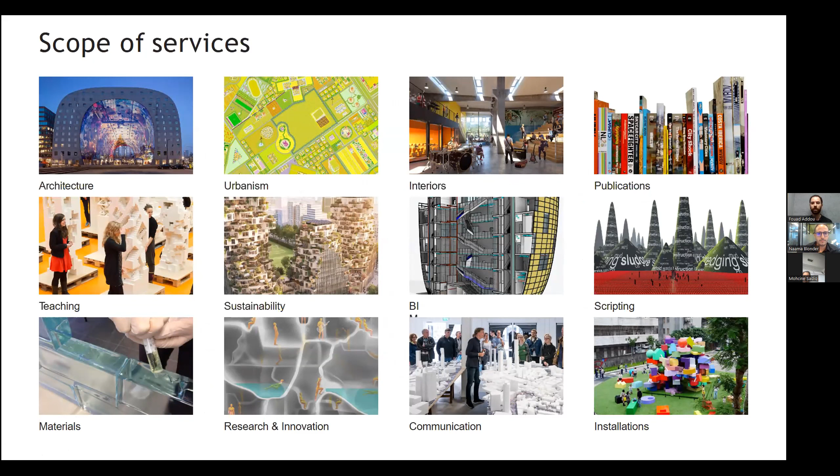So I was asked to talk about density, like how to smartly densify a city and how to deal with high rise. I think that often starts with the fascinations that an office has and our founders had back in the days. A couple of those I'll sum up here. One of them is the idea of the vertical village, basically taking all the qualities of a village, which is the small scale, people know each other. There are many informal ways where it's logical to meet each other, and there are all these qualities that you often lose when you densify and when you design high rise in the city.

So one of the interests is how to do that in high rise. So I've been doing a lot of research and a lot of model making with students and a lot of testing how you could apply it to a building. Of course, a building cannot look like this, but maybe more like this, and probably this is even too complex.

Another thing is how you can make the city more green. Often when we densify, there's a lot of concrete, a lot of vertical facades that are fully glazed, but there is very little green. And often it's only in the horizontal plane on the ground floor. This is, of course, a very abstract image, but what we try to do in collaboration with TU Delft is to find more practical ways to script and test how much a city can handle green on facades, inside buildings, on top of buildings, around buildings, and how can you practically do that?

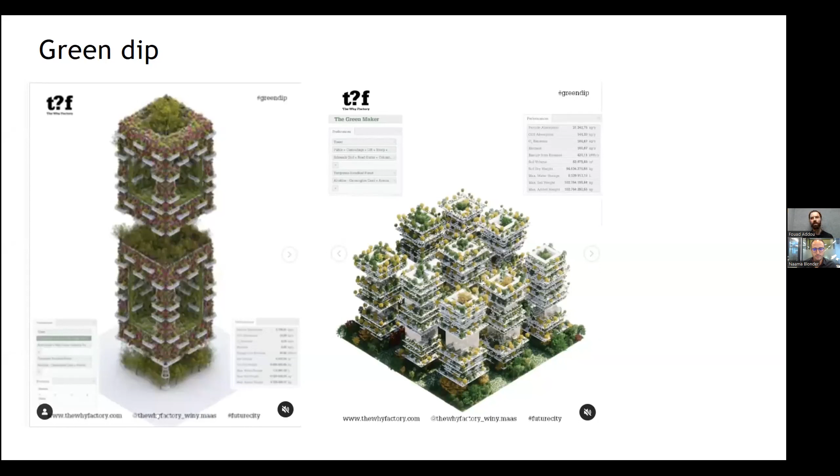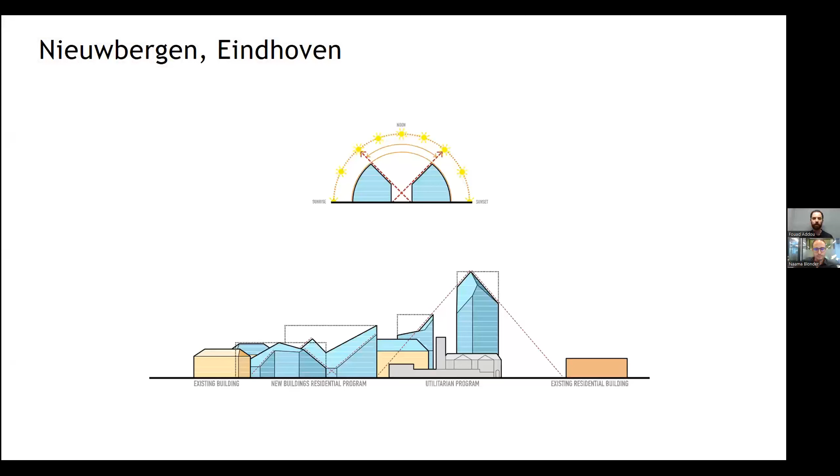And often the belief that people have is that trees and plants cannot grow on top of buildings. But I think it has to do a lot with the way, if you have enough soil package, if you choose the right plants at the right height in the building, that we did in several places. So also in Eindhoven, we have a master plan that basically is dictated by certain sun rules and creating good quality on ground level.

And another thing we try to advocate a lot is the possibility of rooftops. Often rooftops are for mechanical spaces and that's it. But how can we use those rooftops in a better way? How can we activate the city in a better way? So we have this yearly event.

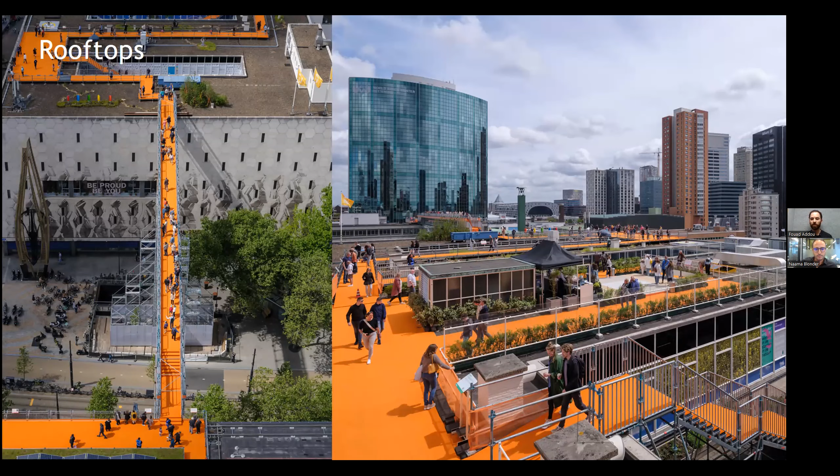It turned into a yearly event in Rotterdam, where MVRDV tries to build these temporary structures that either cross between different roofs or stairs that go to roofs to basically advocate for using roofs better. So there will be exhibitions, all kinds of programs, events, parties on roofs to advocate this to the city.

And we developed this rooftop catalog that shows all the possibilities of how to use roofs and tries to inspire municipalities and possible developers. And of course, there is the question of a city that easily becomes too generic if you just build for the amount of housing we need and don't spend too much on regulating how buildings should look. So we always advocate the idea of having diversity within a kind of overarching

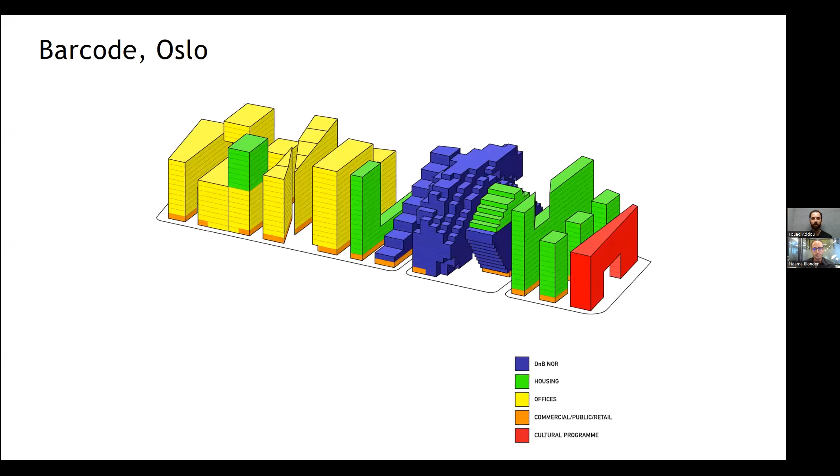So it's a collection that relates to each other, but also is very different. And we think that's important in the city, that you have diversity. Here you can see basically the volumes, if you would take those rules very literally. And I think then, if we go into high-rise, it comes with certain challenges.

I think we as architects have the same or similar challenges all over the world, but also some challenges are different based on your culture, on your municipality and the regulations that you deal with. I think we're often dealing with cities that have to grow really fast. There is a huge demand of housing, and how can we house all these people in the fastest way and often the cheapest way?

But then can we do that in a smart way and keep quality in the city when the city needs to grow so fast? And we're working more and more in Toronto now, and that's I think a great example of how a city that has to grow so fast still needs to keep certain qualities.

And how can we avoid that high-rise cities become too generic, too anonymous? Often you lose human scale when you have to build something fast and house people fast. So how do you keep that human scale and quality in the tower?

Then often what we experience, at least, is a lot of pressure in terms of budget, in terms of efficiency of buildings, which sometimes leads to kind of irrational floor plans that are not the best for the people that live there.

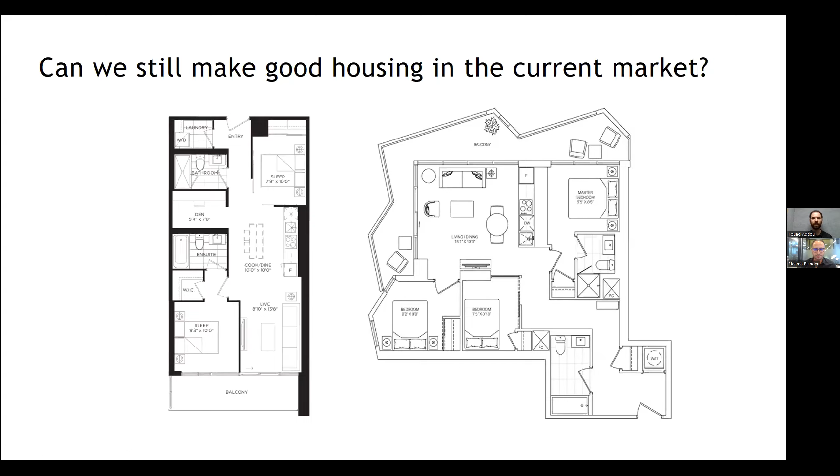And the other is the contact with nature. Of course, it's very difficult in a high-rise city to keep the contact with nature also higher up. Is there a way to still do that? And often we start to question ourselves more and more, and that same discussion came in Toronto in the Quayside competition. When you go up really high, there's a lot of wind and a lot of difficult conditions. Does it even still make sense to have balconies?

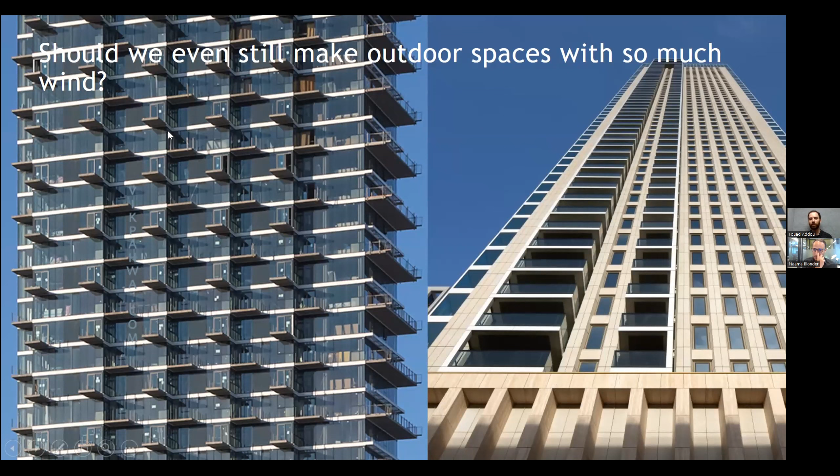On the left side, for example, this is Quayside, one of the towers, the balconies became so small at this height. Does it still make sense to make balconies there? And how do you create qualitative balconies higher up? So over time, we, as MVRDV, did a lot of competitions, and we also started building more and more high-rise buildings.

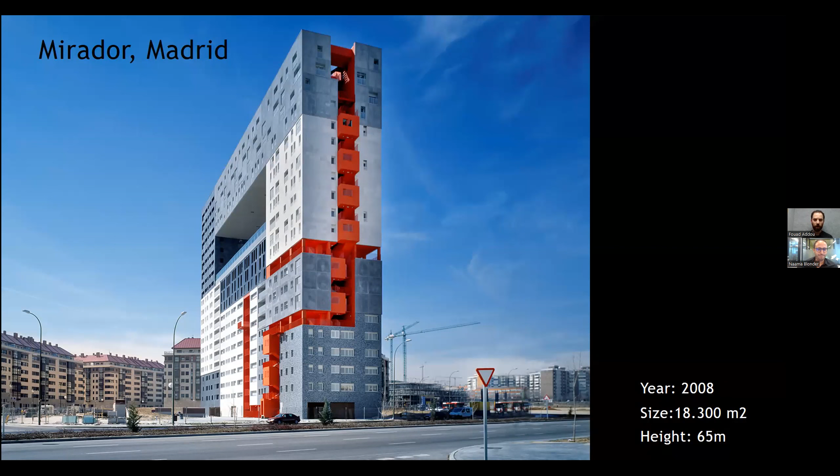And I think there are a couple of themes that we try to always integrate into the designs, and it's different per project. But one, for example, is how to create vertical communities. And I think one of our classics, the Mirador in Madrid, is not necessarily super high, but it has those qualities, I think, to create a vertical community.

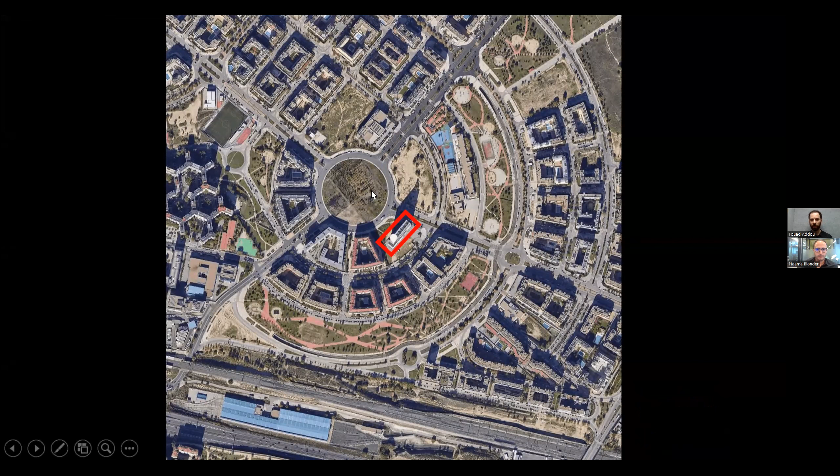So basically, it's a building block that has a different typology than the buildings around. It's kind of an outskirt of Madrid with all courtyard buildings. Of course, it's quite an iconic location around this roundabout. But we tried to do something very different than what was already there. So basically starting with the idea of the quality we liked. So the courtyard block where people can all meet each other, and it's a nice typology of living.

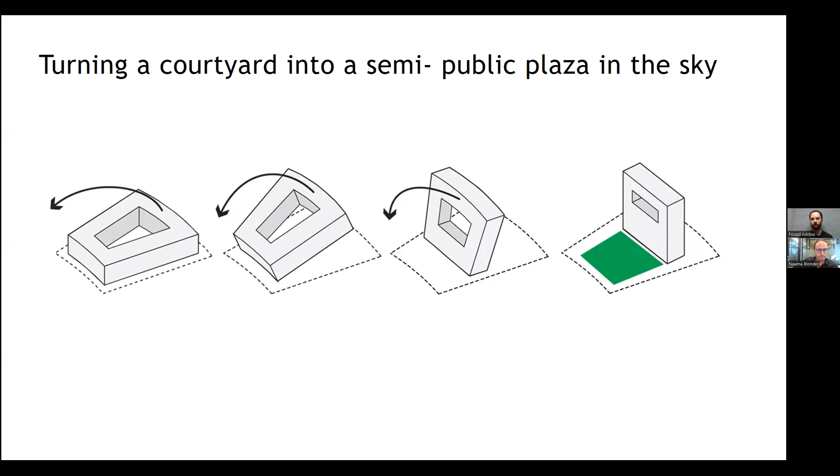But how can you reinvent that if you have to go higher? And at the same time, leave more space around you for other developments. So we literally took the courtyard block and turned it on its side to create a very nice public space next to the building, but also inside the building higher up. So you can have gathering high up in the building.

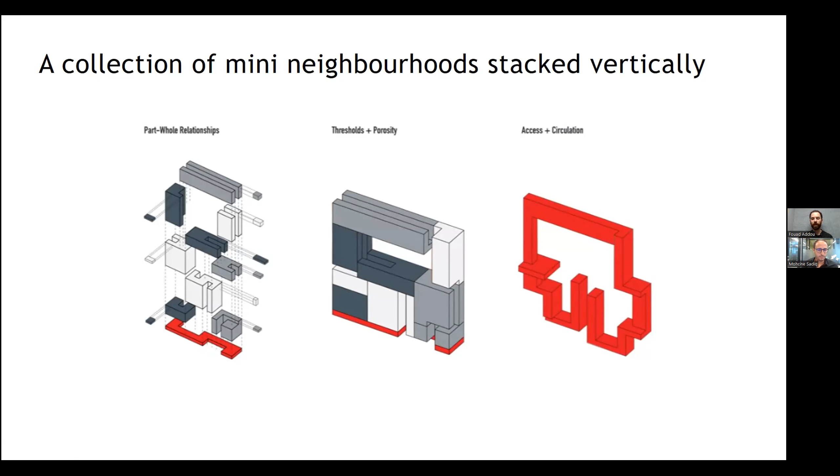But I think in that way, a vertical building becomes way more interesting because you have a diversity of apartments, diversity of people, therefore, and kind of streets in the sky that you would not have in a normal high-rise. Like, for example, this one, this is an outdoor street that is much wider than a corridor, where people can meet higher in the sky instead of on the ground floor, which I think is quite interesting.

Another thing is how to humanize the tower. Often towers become quite generic and you lose the human scale inside because every floor is the same. We need certain typologies of apartments that work well in the market, and that's it. But how can we do that hopefully better?

So this is an example in Amsterdam. We call it the Valley. The highest tower is 100 meters high. It's a collection of 3 towers together with one base building. It just finished building and people start living there.

So the idea was here to, first of all, we started with the program we needed and then we pushed the towers to the edges. And the edges would represent basically the relationship with context. It was quite a corporate environment with a lot of glass facades.

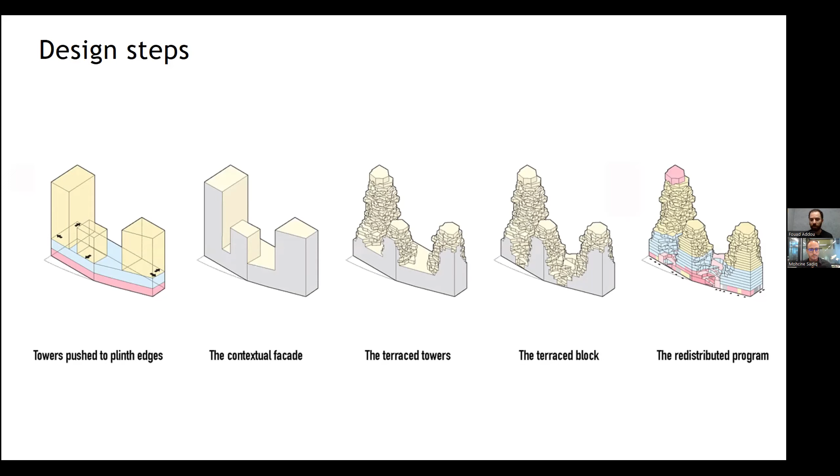So we said, okay, the outside is relating to its context, but then everything that happens behind that exterior facade wants to tell the story about creating human scale and starting from the individual unit to start expressing the individual unit, which normally you never read in a tower. And that altogether as a composition became a kind of natural valley, as you can see it here.

So of course it looks quite expensive and it most probably was, but I think it all depends on the environment, the moment in time you build something, having the right party next to you that has the same ambition and kind of daring to take that leap.

And I think here you see that contrast between the exterior facade, which is the contextual one, and the interior where you start reading those individual units. And the interesting thing here, I think, is that by breaking up the volume and creating all these different units that come out and go in, you also protect the balconies from wind. So you get a way nicer climate on your balcony than you would have in a normal balcony principle.

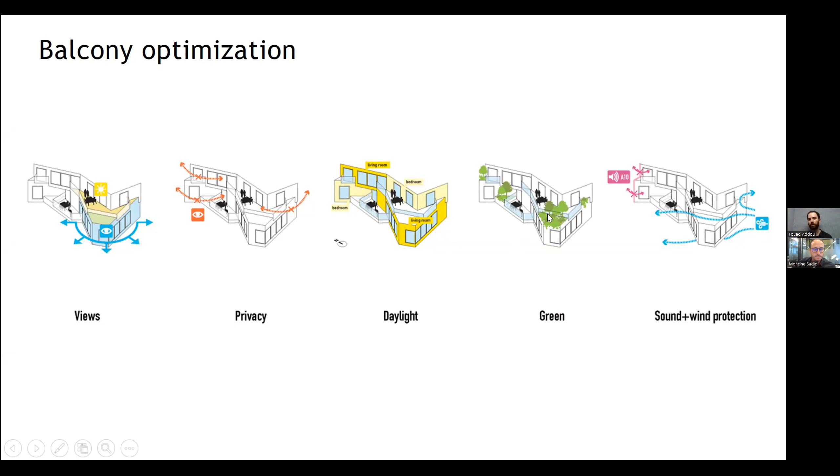So we try to do it a lot in the company, to use scripting to optimize your design. So we used scripts to optimize views from your living rooms, to create privacy between balconies. Of course, when you pop out your volume, that becomes a challenge: to make sure you have enough daylight in every block, because when a block sticks out, the apartment below has less sunlight. So what is the optimal condition? And making sure that every single balcony has its own planter and its own green space, and is protected from wind and sound.

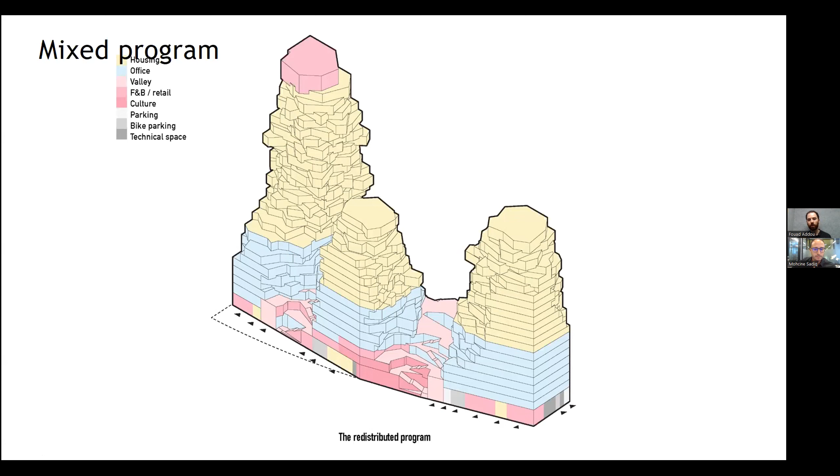So this is how it works programmatically. The ground floor, like most developments, was fully retail and culture and F&B. Above that, we stacked offices and then the housing on top. And I think the interesting thing here is that there is a route going all the way that connects publicly over the terrace and goes down again. I think sometimes it's important to push a little bit, because of course this could have been closed off, could have become a private terrace, but sometimes it's important to push a bit to take that one next step and to make sure that everyone can use it.

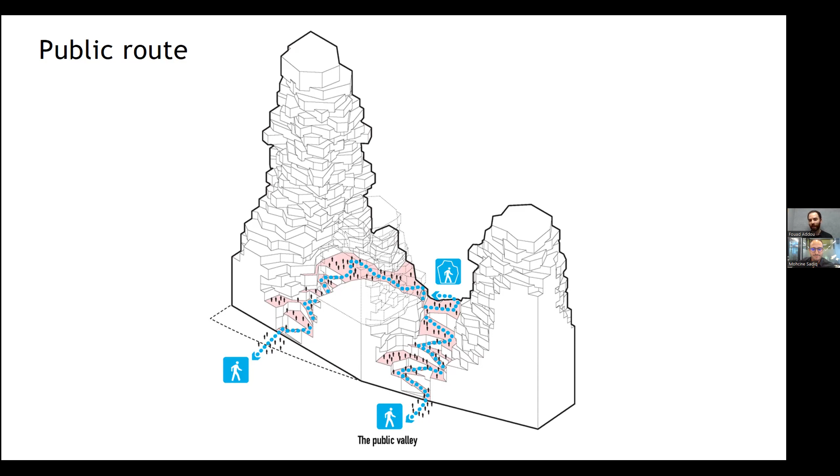And now, for example, people who work there take their lunch breaks there, but actually people from five buildings further also come here to take a lunch break and overlook the beautiful sports fields next to it. So giving back somehow. So this is how that looks. This is the office floor with basically a valley trail that goes up over the terrace and down again, which is open during the day for everyone to enjoy. And then the offices around it.

So we try to use this vegetation strategy that starts very intense at the bottom and becomes less intensive towards the top, choosing the right species that could survive higher up in the building, and the right species for a lush vegetation lower down.

So if you go a little bit higher, those are the apartments. And of course, at first sight, it looks pretty complex. All the apartments are different, which is often the response when we work together with the developer, which of course makes sense. But at the same time, if you look at the plans in a more pragmatic way, the center of all the plans is the same, and every floor of the apartment is actually the same. But the outline dictates having a slightly different living room or slightly different bedroom. And in that way, we believe every apartment becomes different, but has the same services, the same shafts. So it's quite easy to build in that sense, but everyone has a choice to have a completely different apartment.

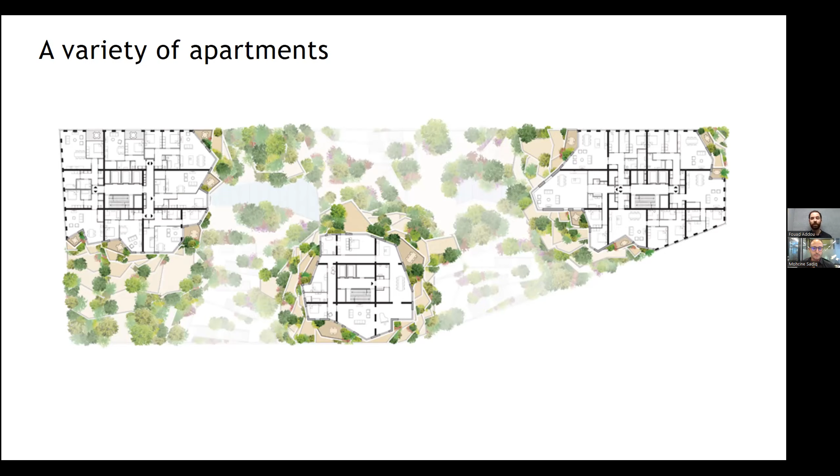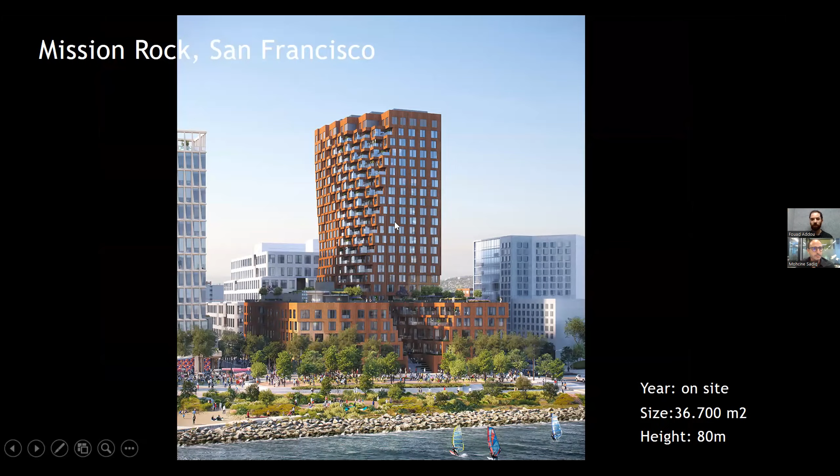So this is a building we almost finished in San Francisco. It's almost done building. It has some similarities to the previous project. It's around 80 meters, but it has one tower. The location is opposite the Giants Stadium. It's a development with other architects, among them Henning Larsen, Studio Gang, and WORKac, where together we developed this small master plan. It's facing the water, and of course one of the most important things was the relationship with the water.

So what we try to do here is stack the program: retail, office, and residential. But one of the problems, which we then tried to turn into an opportunity, is that there was a huge residential floor plate that we couldn't really use, and it was too dark.

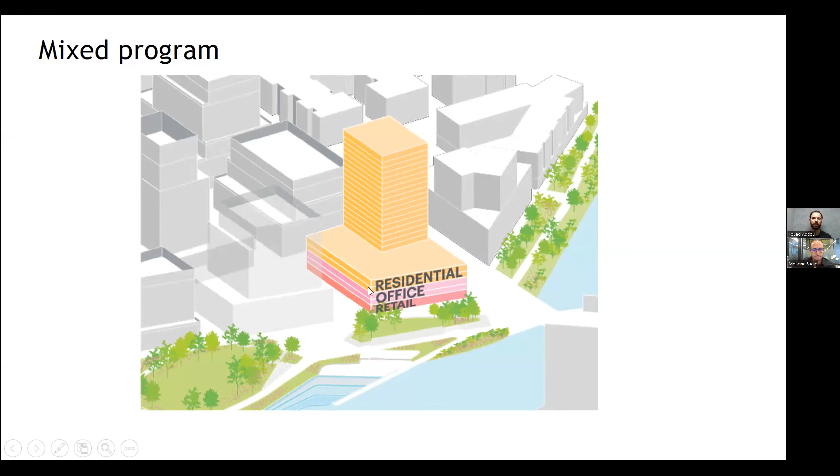So it's okay, how can we turn it into something that actually makes the master plan better? So we basically cut up the volume and created an L-shaped apartment block and a smaller apartment block with a public route going through that would connect to other public carvings that go through the building or over the building or around the building in the other buildings in the master plan. So we become part of a network through the rest of the development.

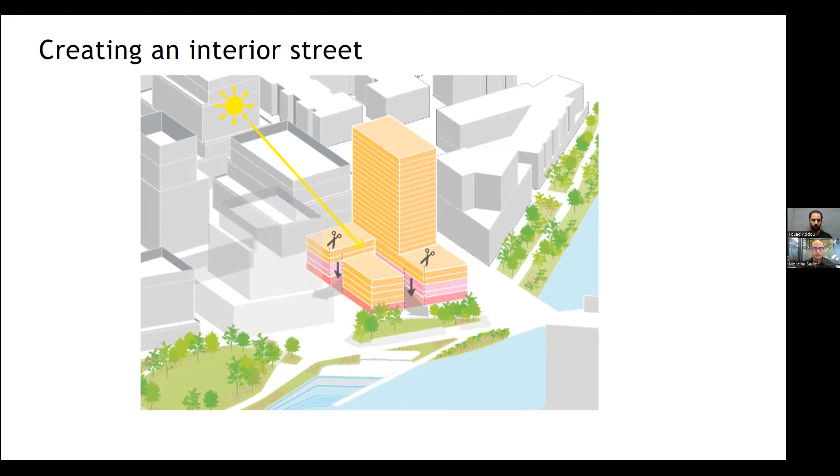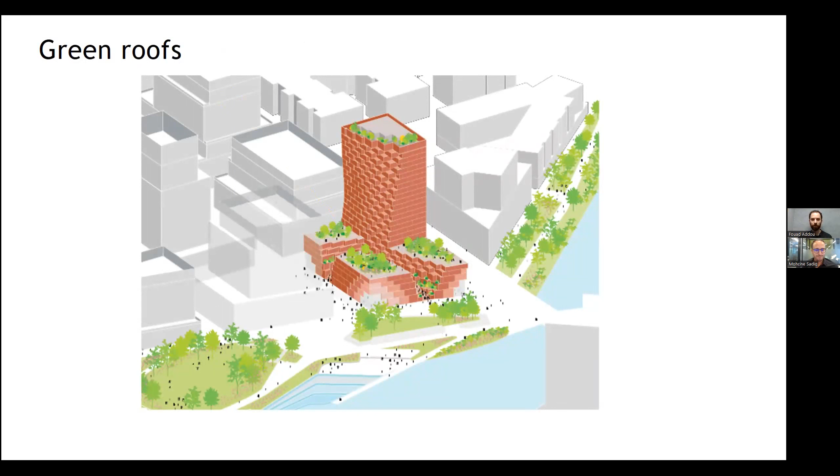And then that carving, we turn it into, again, like a fragmentation of the facade where you have the individual balconies, which then became, we call it a mission rock. So sort of a valley going through with fully green terraces on top of the base building. And I think one of the qualities is that, and this shows when the budget is sort of tight, but there's a bit of space, where do you spend that budget?

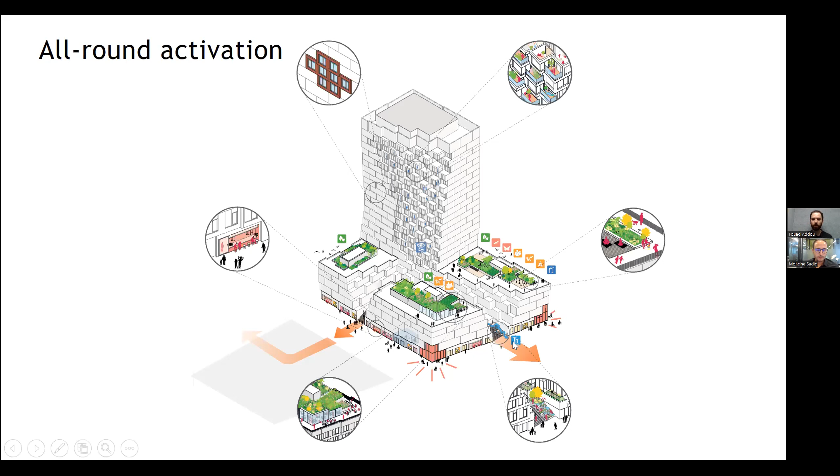And what we try to do here is to create it in the space that faces the water, so where the most interesting views are, and basically try to create all these apartments with corner conditions, because normally there are only 4 corners in the tower, but by pixelating and fragmenting the facade, many apartments start to have a corner with 2 beautiful views towards your context. And then we say, okay, the rest, since there will be a lot of wind, like in most towers, there will be no balconies. With then the publicly accessible or communally accessible roofs and the public route going through this canyon in the center.

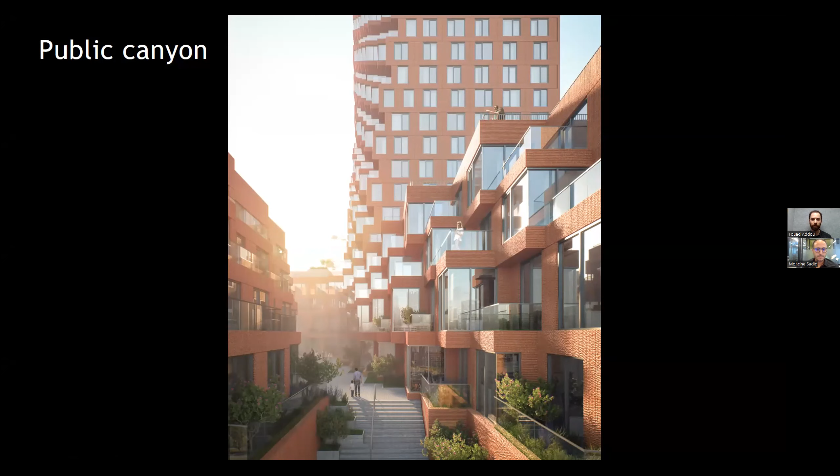So this is how that looks like. It's pretty far already in terms of building, but this would be that route. So of course there were a lot of discussions. It's always the question of, like, do you have to close off that canyon later in the day? Is it safe to have everyone going up? And we of course understand all of that. But I think with a bit of collaboration, we managed to convince that it was worth it to have this public route. And we're really happy that we managed that in the end.

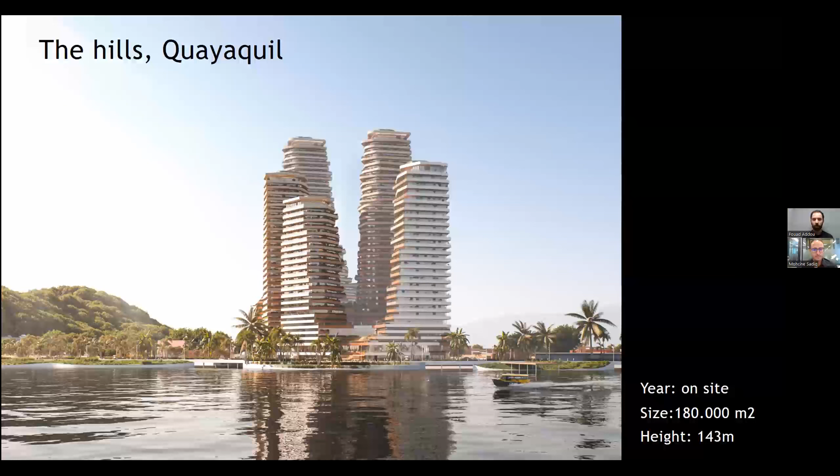And another thing is the vegetation. We already talked about it a bit, but we tried to bring that to the extreme in Ecuador. So this is the development. Now it seems, of course, very out of context because there are no other buildings around yet, but there will be a waterfront full of high rises, where we developed 6 towers that currently started on the site. The highest tower is 143 meters.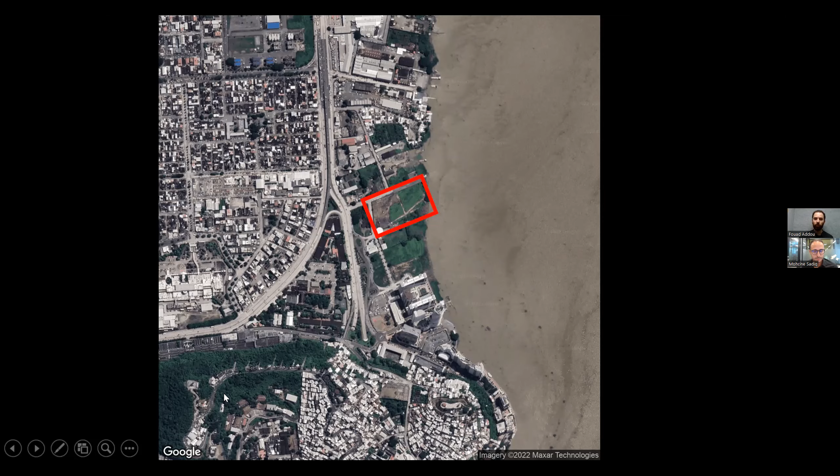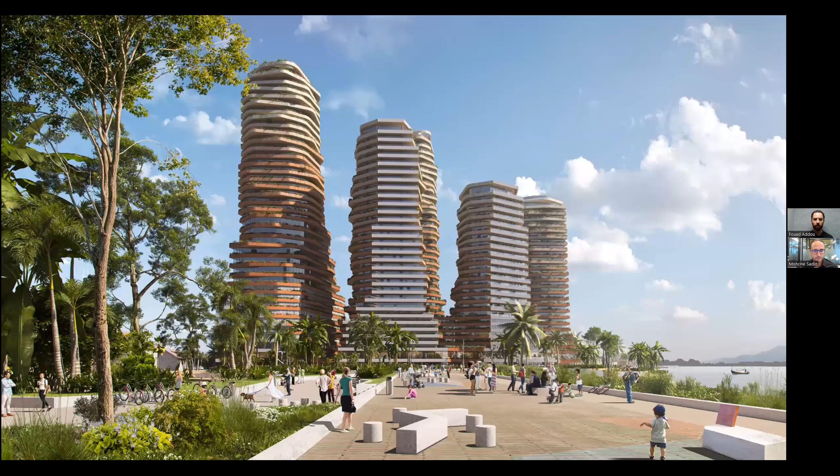So basically, the inspiration for this project was having a lot of human scale, very small informal developments on a hill next to us, which was super green, and that hill was really important for the city. We thought, how can we take that as an inspiration and basically not design only a skyline, but also design a natural topography. So become part of nature instead of only making a city gesture. So it had a similar concept.

So the outside was very similar to the buildings that are further up in the waterfront. So it's a lot of Miami-ish white facades, and everyone loves that there. But we thought, okay, we can do like everyone else, or we can try to make it slightly more interesting and try to introduce color, materials that relate to nature, and integrate vegetation, which they didn't have anywhere else in the city. It was all just empty balconies. So that's why we tried to create this interior world that was fully vegetated and uses materials that refer to nature.

So basically the starting point was we needed to make 6 towers at the beginning. Now there became 5 residential, commercial spaces in the bottom, and a lot of amenities, which we really appreciate. This developer pushed a lot for amenities as a collective need. We tried to push down the towers and create a bit more human scale towards the waterfront and go higher towards the more urban side on the back. And I think often in towers, especially when you design a collection, it's very important that everyone has good views.

Like everyone has a qualitative apartment that has nice views to, in this case, the river. So the buildings were completely shaped by optimizing views for all the towers. So even within a very dense environment, I think you can try to optimize the quality of every apartment.

Then we connected all the volumes together towards the base step volume, which would help you to break the wind, and at the same time gives you the opportunity to have a lot of communal spaces and a lot of vegetation between the buildings. And then we rounded it off, first of all, for safety reasons on the ground floor, because there's a lot of security problems there. And also by rounding it off, you basically make sure that there are never really corners, and corners are usually the most problematic when there's high winds.

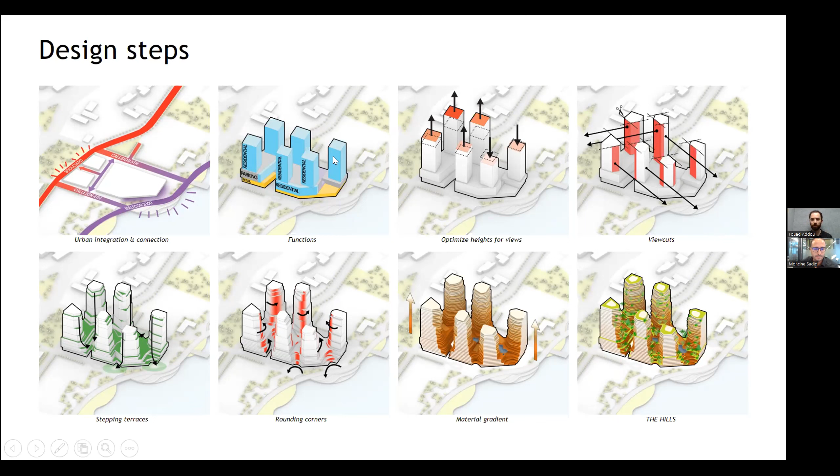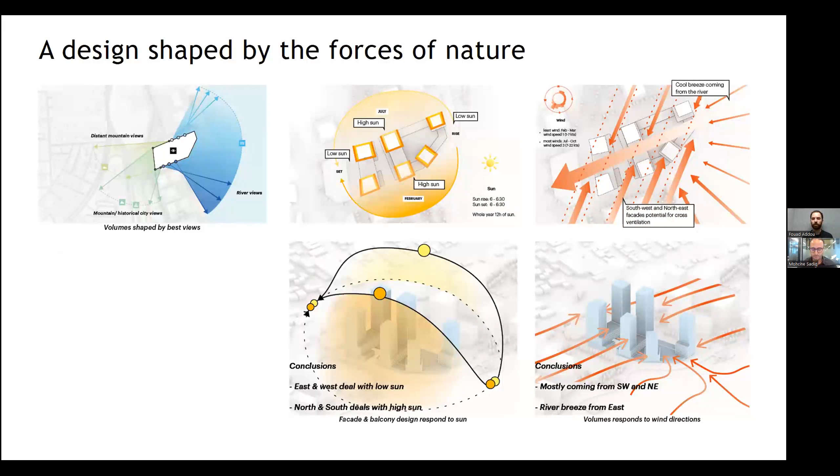And then we integrated this kind of natural gradient of materials in the building and vegetation. So in this one, we tried to really push and work a lot with environmental factors. So one was views, one was the sun. So making ideal balconies that are shading the balcony below, making sure that based on orientation those make sense, and minimizing wind loads. So in that way, we scripted the facades to be as optimal as possible. So you would shade your balcony below and still make sure everyone has good views and daylight.

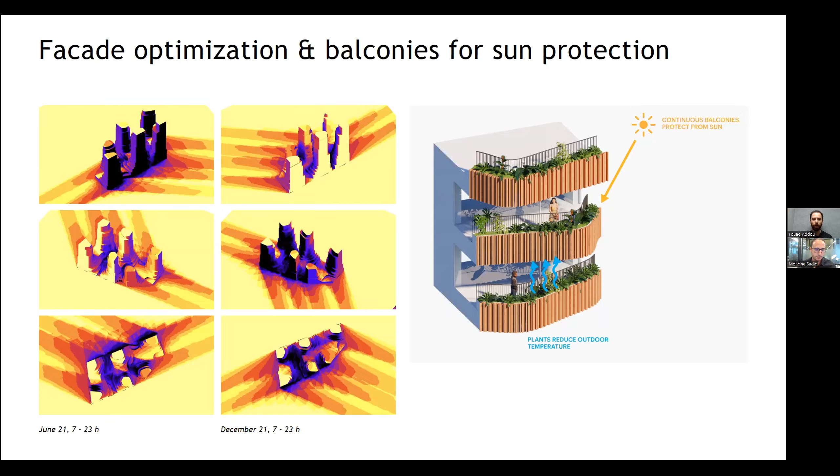So this is basically how it started to look like, this natural facade, but in every single balcony there would be vegetation all around. Our developer was okay with that, and we were proceeding with this, and of course the vegetation helps you a lot with cooling down temperature. This is how that looks like. So that's a space in between.

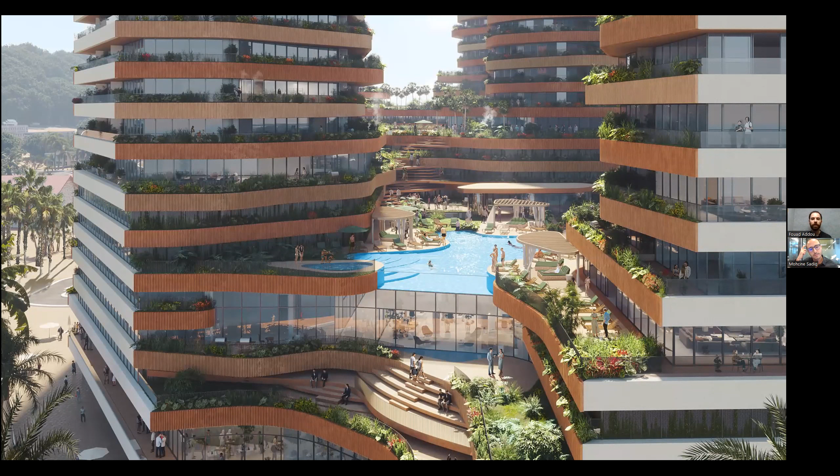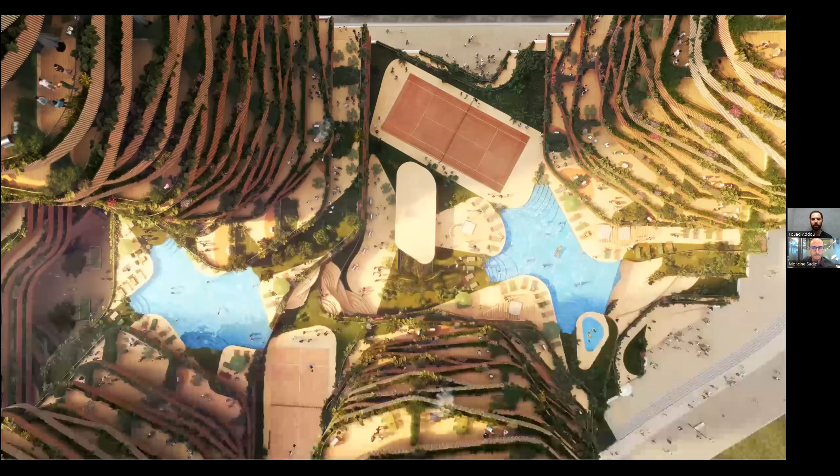There's a lot of collective spaces. For example, in the center, you see a pool which everyone could use. Of course, this is communal, not public. Lower down, there's a terrace where you can overlook the water. And then just below that, it's fully public. So there's two levels of public retail with a tribune also facing the water. So we try to at least introduce a tribune for everyone, which would basically be here, where people could gather. Again, similar discussion, is it safe or not, but we managed in the end. So this is how that collection of communal spaces looks like.

I think one of the other things is how do you create really qualitative outdoor spaces, but also make sure there's differentiation in your apartments. So I think a good example is this one, we call it the Sax, which is a tower that hopefully will get built next year in Rotterdam. So this is a small island in the river the Maas, which we call Small Manhattan, where the biggest towers of Rotterdam are.

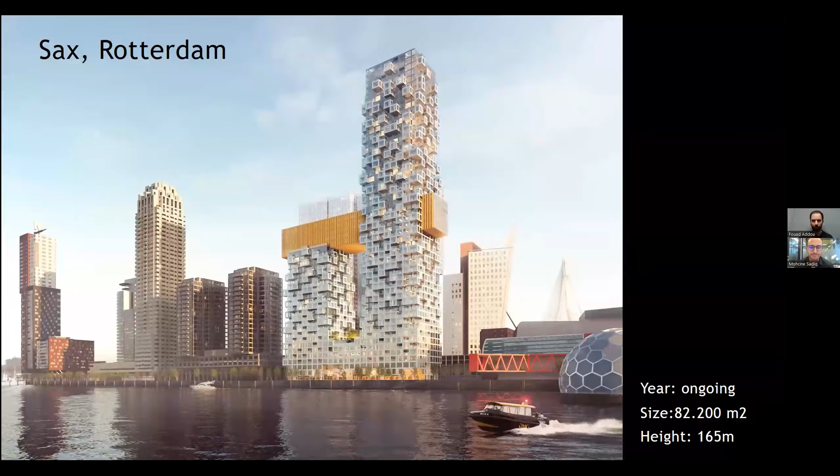So what we did here is basically two towers that are connected with the volume that back then was a hotel. And then there's this gradient of pixels that start as loggias in the bottom and evaporate and become balconies higher up. So this is the location, facing the water, but being part of this big collection of towers. And in the future, they will build an island here with even more towers. So this is how it looks from closer up.

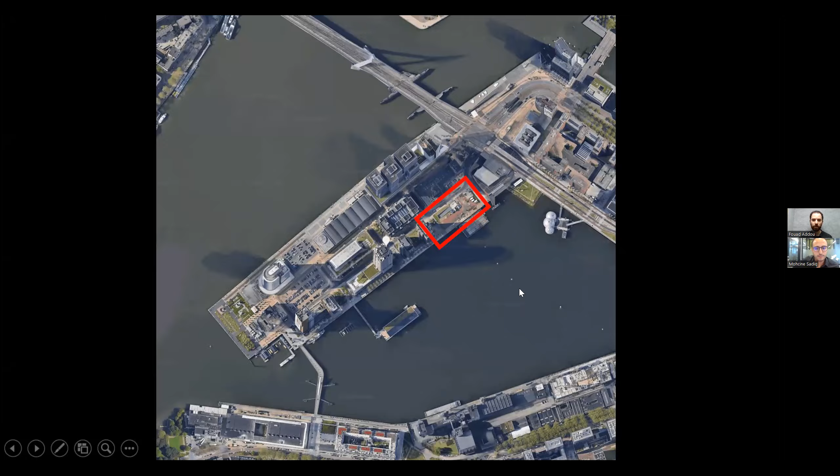And as you can see, we truly believe in protecting balconies from wind. So what you can see here, there are all these different types and different forms of balconies that are protected. And you can also see that in the floor plan. So every living room is kind of different because that pixel or that volume is in every floor in a different place. Which, if you make those modules as a piece in itself that you can just place against the facade, is not necessarily very complex. Of course, more insulation lines and more facade, but because of that you also create way more interesting and more protected balconies higher up.

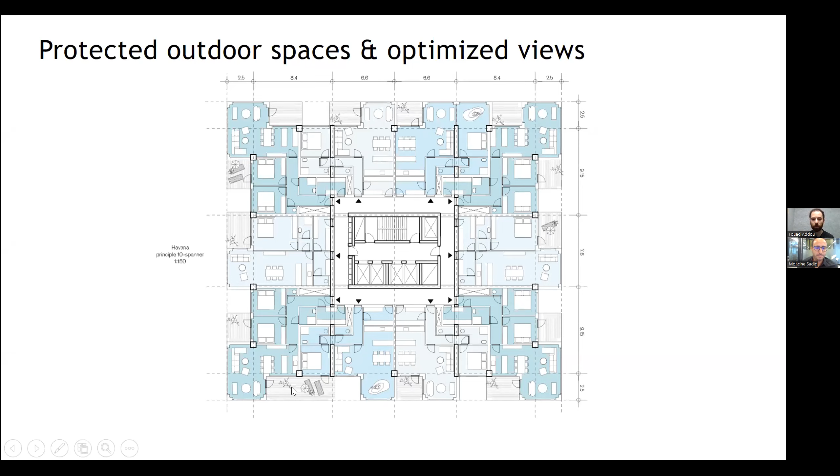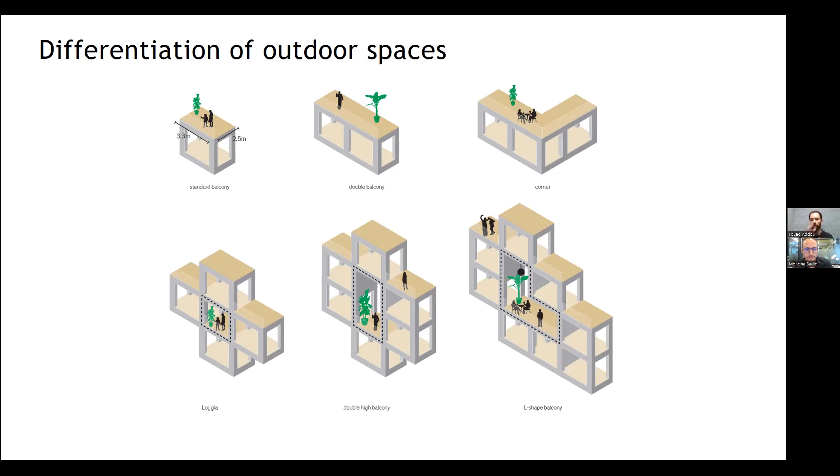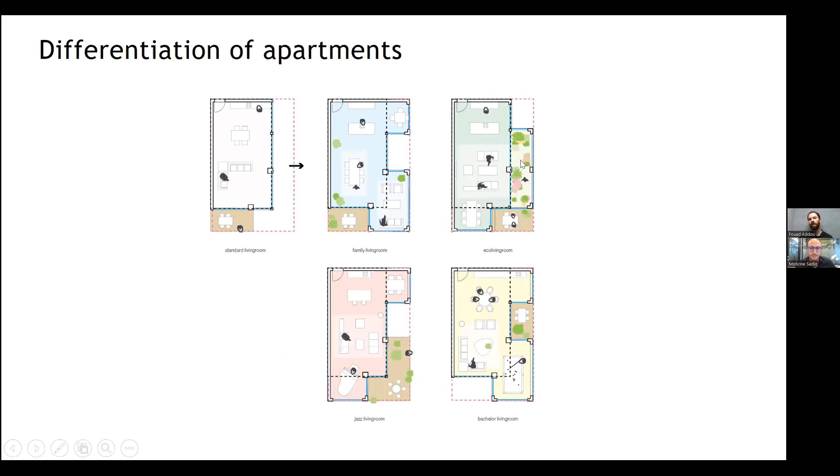And what we try to show here is that the way you connect these pixels creates different shapes, sometimes double high, sometimes single high, sometimes an L-shaped balcony. So it's different for everyone that lives in the tower. And the same in the floor plan. So in its base, this rectangle of the living room is the same, but based on how you place the volumes, every living room becomes different. One, for example, we call the jazz living room, where you could have a big piano standing in that corner. Or when you have the bachelor crib, what if you create a kind of pool table there, or maybe you could even have a small greenhouse or a winter garden in the building.

And I think another one is the last one actually. Yeah, sorry, that's the last. I will be quick. The one we think is really an impulse for the neighborhood. Like sometimes neighborhoods need something that is a beacon, and that was a starting point for this one.

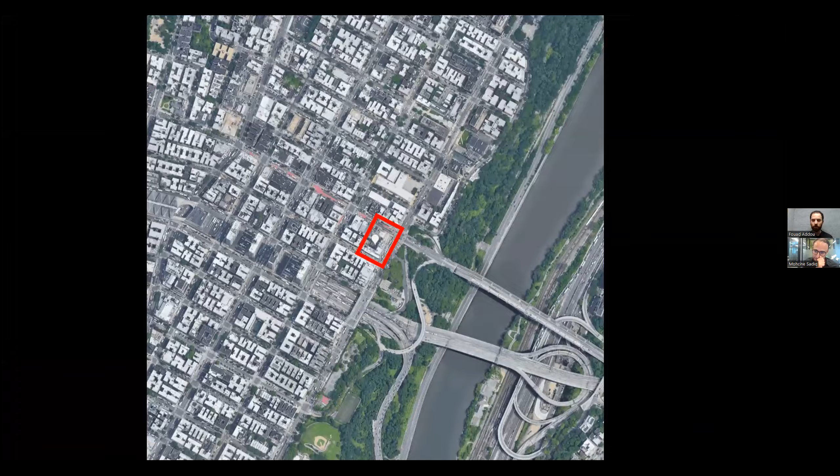And some execution things could have been better. Afterwards, we're not super happy about everything, but we really think it became a beacon that celebrates this part of the city, which wasn't really celebrated before, and people were quite happy with it. So that's it, actually.